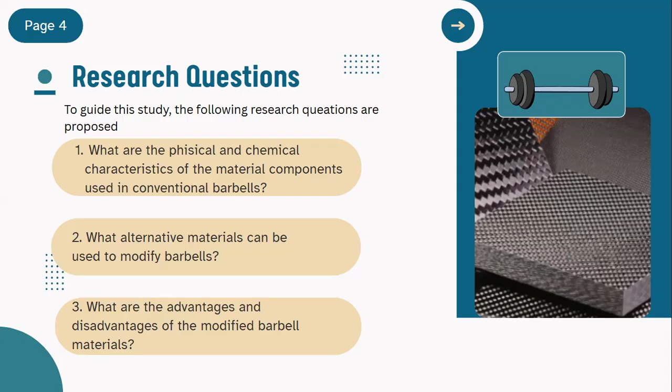This study aims to achieve the following objectives. The first is to identify the physical and chemical characteristics of the material components used in conventional barbells. Two, to analyze alternative materials that can be used to modify barbells. And three, to determine the advantages and disadvantages of modified barbell materials.

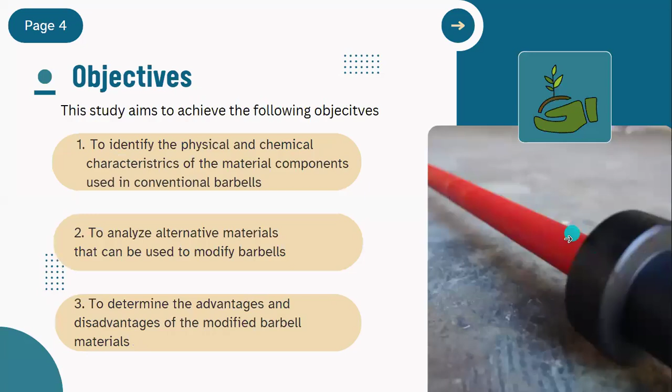Next. The urgency of this research lies in these three points. The first is to encourage innovation in environmentally friendly materials within the fitness industry. Two, to raise awareness of the role of materials chemistry in reducing the environmental impact of everyday products. And three, to support the principles of the circular economy through the redesign of materials that are naturally biodegradable. Next.

Material modification in barbell equipment. First, mild steel. Advantages: first, low cost and widely available. Two, adequate stiffness or Young's modulus for standard lifting. Disadvantages: low yield strength, or prone to deformation under high loads. Two, susceptible to rust without coating.

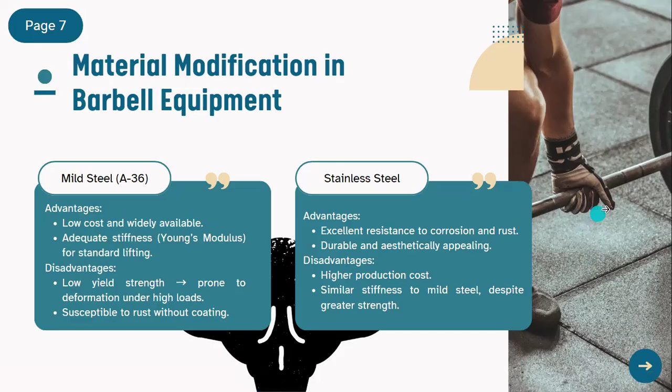Material 2, stainless steel. Advantages: excellent resistance to corrosion and rust. Two, durable and aesthetically appealing. Disadvantages: first, high production cost. Two, similar stiffness to mild steel despite greater strength. Next.

3, high strength steel. Advantage: high strength to weight ratio to allow for lighter bar design with strong performance. Disadvantage: expensive, typically used only in premium grade barbells. 4, cast iron. Advantage: strong and affordable for basic use. Disadvantages: prone to rust, non-adjustable weight, can damage flooring and produce loud noise when dropped.

5, PVC plastic. Advantages: lightweight, inexpensive, rust-proof. Disadvantages: low durability, cracks under heavy load, environmentally unfriendly, short lifespan, difficult to recycle. Rubber coating. Advantages: protects floor and reduces noise, offers improved grip and comfort. Disadvantages: rubber may crack or peel over time. Two, synthetic rubber is not biodegradable and difficult to recycle.

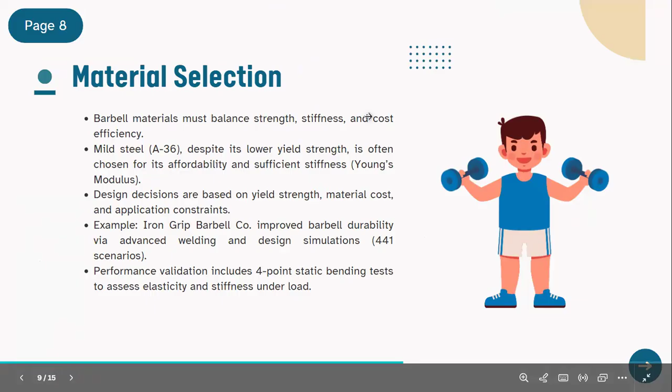Okay, the next topic we're going to talk about is material selection. Barbell material must balance strength, stiffness, and cost efficiency. Mild steel, despite its lower yield strength, is often chosen for its affordability and sufficient stiffness. Design decisions are based on yield strength, material cost, and application constraints. Example: Iron Grip barbell improved barbell durability via advanced welding and design simulation. Performance validation includes a 4-point static bending test to assess elasticity and stiffness under load.

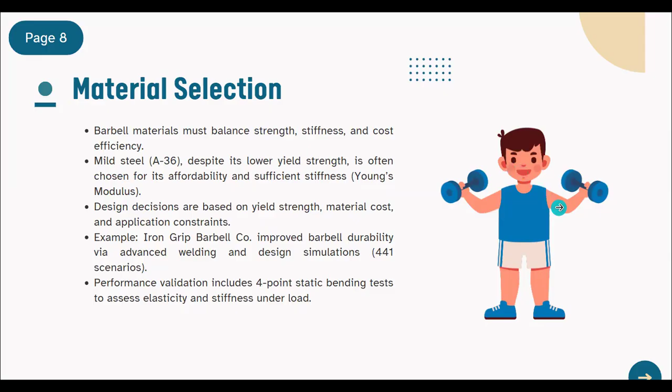Next we are going to talk about the physical and chemical characteristics of conventional barbell materials. First, the physical characteristics. Barbells exhibit elasticity affecting motion during the lift. Barbell design affects impact joint force, lifting efficiency, and user biomechanics. Elastic behavior causes differences in bar motion at the ends and center during dynamic lifts.

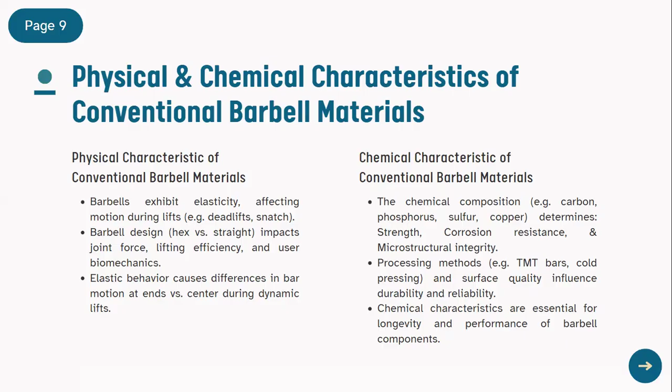And the second one is the chemical characteristics of conventional barbell materials. The chemical composition, like carbon, phosphorus, sulfur, and copper, determines strength, corrosion resistance, and microstructural integrity. Processing methods like TMT bars, cold pressing, and surface quality influence durability and reliability. Chemical characteristics are essential for longevity and performance of barbell components.

Okay, next we will discuss the alternative materials for barbell modification. We have two alternative materials. The first is carbon fiber composite materials. Composition: fine filaments with 5 to 10 micrometer diameter, grouped into bundles. Matrix: epoxy resin as fiber bonding agent. Tensile strength 3,500 to 7,000 MPa, exceeding ordinary steel. Elastic modulus 230 to 900 GPa. Very rigid yet lightweight structure.

Then we have polymer composite materials. Definition: multi-phase material from a polymer combined with other materials. The polymer matrix is either thermoplastic, which can be remelted, or thermoset, permanently hardened. Examples: epoxy resin, polyester, vinyl ester, reinforcing fibers such as glass fiber, aramid or Kevlar, and natural fibers.

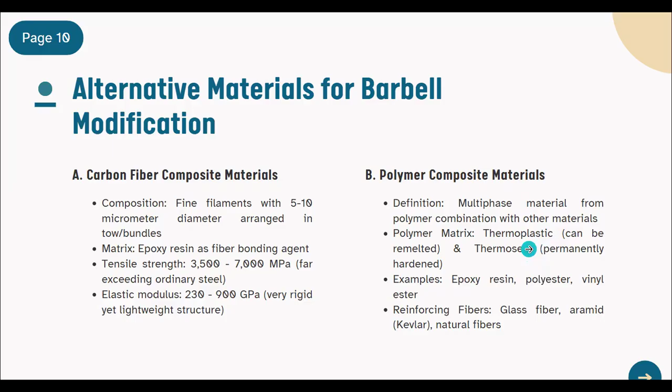Okay, next is advantages of modified materials. The first is high strength to weight ratio. Specific strength 5 to 10 times higher than ordinary steel. Supports maximum athlete performance. Design flexibility: precise material property engineering, customizable according to user needs. High corrosion resistance: excellent resistance to chemical degradation and reduced maintenance requirements.

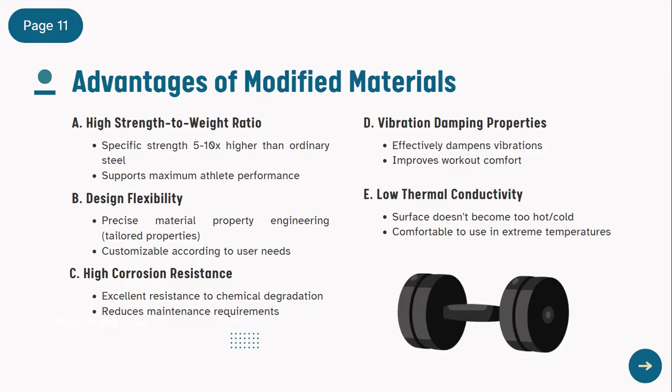Next, vibration damping properties effectively damp vibration and improve workout comfort. And low thermal conductivity: it doesn't become too hot or cold and is comfortable to use in extreme temperatures. Next.

Disadvantages of modified materials. First is high production costs: expensive raw materials and fabrication, a barrier to large-scale implementation. Complex manufacturing process requires precise parameter control and needs advanced equipment and specialist expertise. Different failure mode: brittle failure without deformation, unlike metals that show plastic deformation.

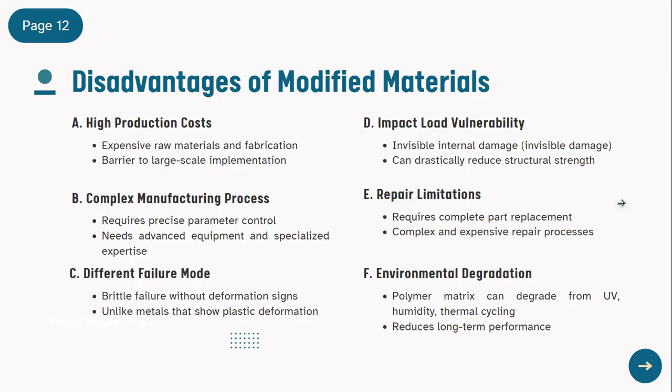Impact load vulnerability: invisible internal damage can drastically reduce structural strength. Repair limitations: requires complete part replacement and a complex, expensive repair process. Environmental degradation: the polymer matrix can degrade from UV, humidity, and thermal cycling, reducing long-term performance. Next.